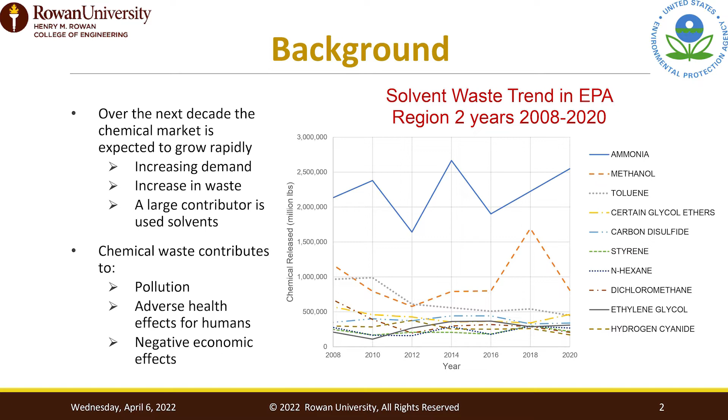So from this graph here, you can see that there is an increasing trend in solvent waste. And if you were to look at this graph on a countrywide scale, not only Region 2, the trend would also be increasing. So why is this an issue? Because this waste trend will lead to an increase in pollution, it will have adverse human health effects, and it will have negative economic effects, such as companies having to pay fines due to improper handling of their waste, or companies having to put any capital at all into handling their waste solvents.

So these are our current 3 strategies of handling waste. We have incineration, which is very costly and has a big environmental impact. Then we have on-site release, which is where you release it directly into the air, water, or an injection well. And finally, we have off-site release, which is where you simply send your waste solvent to a third-party company. These 3 are our current options, but they are not the best.

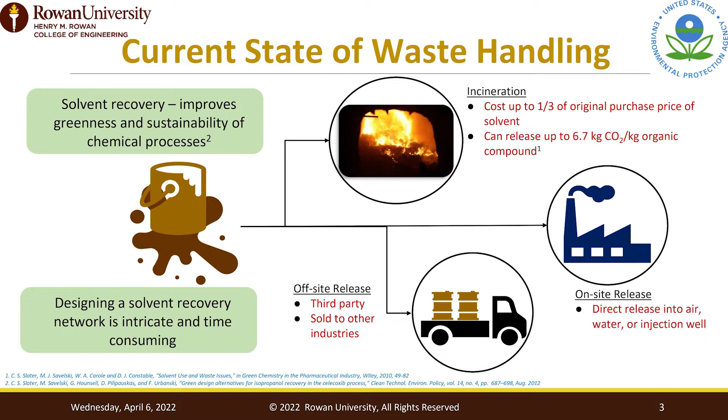One that's better is solvent recovery. Solvent recovery will improve the greenness and the sustainability of all these chemical processes. And the one reason why it is not more widely implemented is because it is a very intricate and time-consuming process. So our solution is we developed a comprehensive framework for the solvent recovery strategy that can be used across industries that will increase the ease and the efficiency of the chemical processes.

So what we do is we intake a set of chemicals that a waste stream is comprised of, we put it into our superstructure, and we can show the optimal pathway or optimal technology sequence to recover the solvent with your desired percentage of purity. And this is going to give these companies a great foundation in their design process.

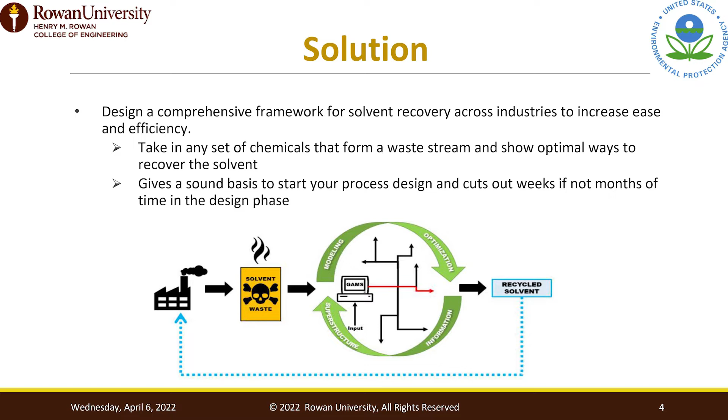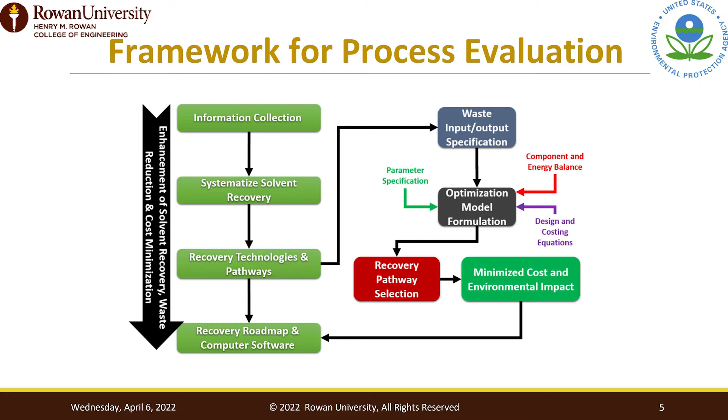So this is our framework currently. I want to focus on the left side of this figure where we have information collection, the systematization of solvent recovery, our technologies and pathways, and our roadmap. So basically what we did in the beginning was a lot of literature research into different technologies and their associated equations, mass and energy balances, cost equations, and then we also did a lot of research into different chemicals, creating a chemical database that will include different chemical and physical properties such as density or heat of vaporization.

Once we have all of that research compiled, then we put it into designing a recovery process. So here we developed 4 stages, with stage 1 being solid removal, stage 2 being recovery, stage 3 being purification, and stage 4 being refinement. So we take our waste stream and the chemicals it's comprised of, and we put them in through stage 1, it goes through all 4 stages, and out you have your recycled solvent with your desired purity or recovery percentage.

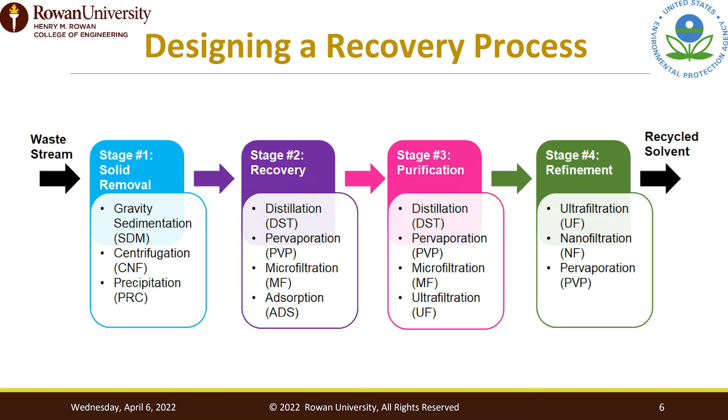In each stage, we have about 3 to 5 technologies. And another thing to note is if, say, a waste stream does not have solids, it'll simply just bypass stage 1 and continue on to stage 2. So this is an example of one of our technology models. We have one of these per technology per stage, right? So there is a lot going into this.

So here's our filtration model, where we have our feed, and then coming out will be our retentate or our permeate streams. On the table on the right here, we have all of our equations that are comprised in this specific model. So we have our retention factors, concentration factors, flux balances, and our power required.

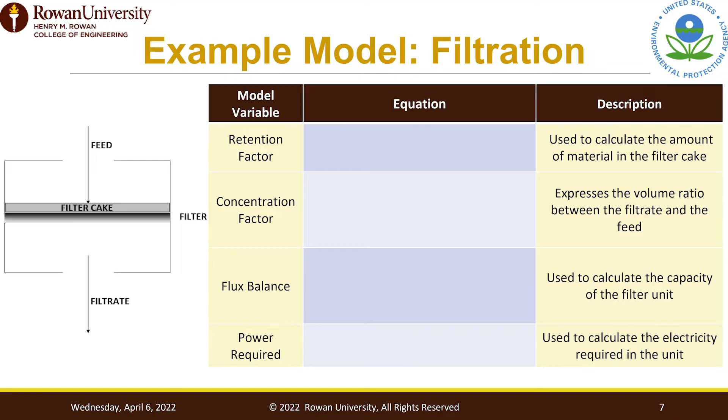And what we do is we input our waste stream, and it will go through each of the 4 stages, including the bypass streams, and it'll give you out your optimal technology pathway. But what it will do is it will compare every single technology sequence, and it will compare them based on a cost analysis and an environmental impact assessment.

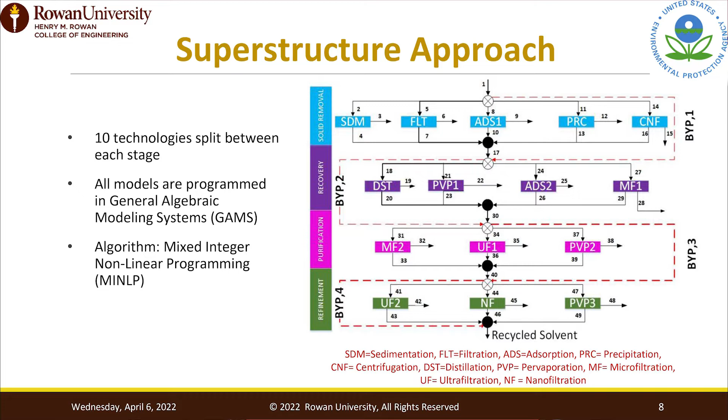And all of our technology models are programmed via GAMS, which is the General Algebraic Modeling System. And the solution algorithm that we use is MINLP, or Mixed Integer Nonlinear Programming. So now that we have our superstructure, we have an example case study where we designed to recover ethyl benzoate from a Johnson-Matthey chemical process.

This chemical process can be illustrated in the figure on the left, where they took PET packaging waste and put it through a dye removal where they swell it using ethyl benzoate, and they further filtered that ethyl benzoate back out, and that's where we come in. We have the solvent recovery of the dye separation. And then the PET is diluted, it's filtered out again using ethyl benzoate, and you have your solvent PET separation, and finally you get your 96% recycled PET.

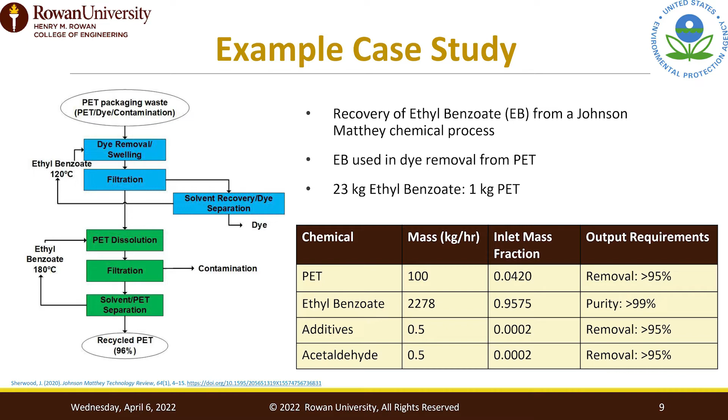So down on the table on the right are what we put into our superstructure. So we have our list of chemicals, our mass flow rates, our inlet mass fractions, and finally our output requirements. This will go into every single case study that we do. And these are the results that you obtain.

So the optimal pathway that our strategy selected was for stage 1, sedimentation, stage 2, adsorption, stage 3, microfiltration, and it ended up bypassing stage 4 due to the fact that after stage 3, the desired output of ethyl benzoate was obtained, so there's no need to spend any money further refining it.

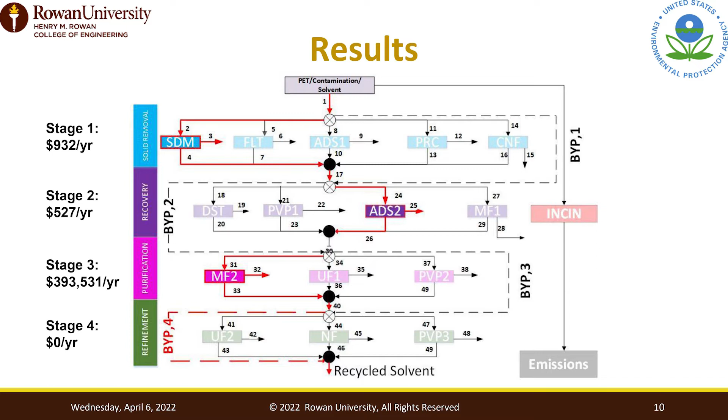On the left side of this figure, we have the beginning of our cost analysis, where we have the dollar per year for technology per stage. So for example, sedimentation in stage 1 will cost approximately $932 per year, and following down through all 4 stages.

Further results that we have are, we break down our cost analysis depending on the type of cost that it is. So we have annualized capital costs, we have our raw materials. So for example, labor costs contribute 10.74% to the overall cost. So the overall cost of this optimal technology pathway is approximately $394,000 per year. And when you compare that to, say, the most common, incineration costs approximately $7.72 million per year.

Now to look at our environmental impact assessment, we have incineration that has orders of magnitude greater impact than solvent recovery. So instead of incinerating this waste stream, which would release a lot of CO2 into the environment, solvent recovery has a lot less of that environmental impact.

So in summary, what we did was we established a superstructure framework approach to find the optimal technology sequence for the recovery of different waste solvents across industries. And we optimized the recovery of ethyl benzoate in the Johnson-Matthey process.

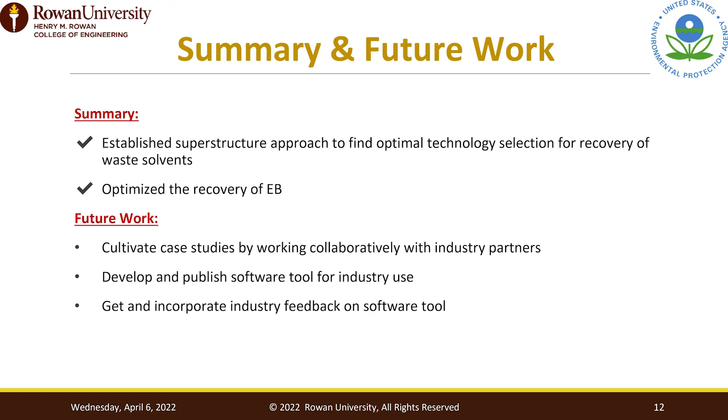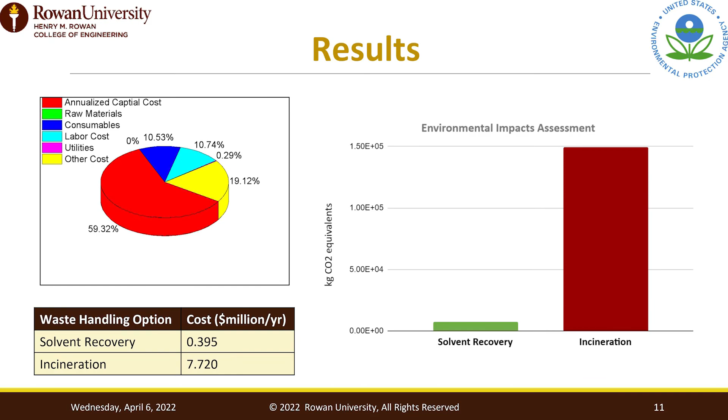In your cost analysis, you showed that this process is way cheaper than incineration. I'm wondering why, because incineration seems simple. I understand it generates CO2, but why is it more expensive compared to this multi-step process? So basically, it takes every technology sequence possible out of all 10, compares them across a cost analysis, and develops the least expensive one. Then we run a separate model for how this specific waste stream would do with incineration, and overall, based on the cost analysis and the chemicals in this waste stream, it ended up being cheaper.

Okay, I guess it goes to where the data on cost come from, what you put into the model. Do you know where those assessments of cost per kilogram come from? What's the source? So there's multiple sources depending on the technology. That would be more our literature research background and citations, but the cost equations are from credited journals that we use. All right, thank you.